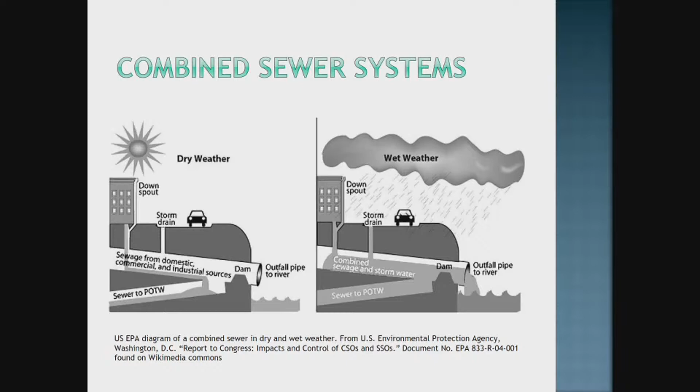Back in 2003, we started with VSK to address the CSOs. About in 2011 is when we got the long-term control plan approved with DNR. It was 10 phases of this plan. We got 1 through 7 completed. There's 3 more that's still to be done. And one thing, like Ted was saying, Iowa, or Ottumwa, was the first community to get a 25-year schedule instead of trying to shove all this down in 10 years.

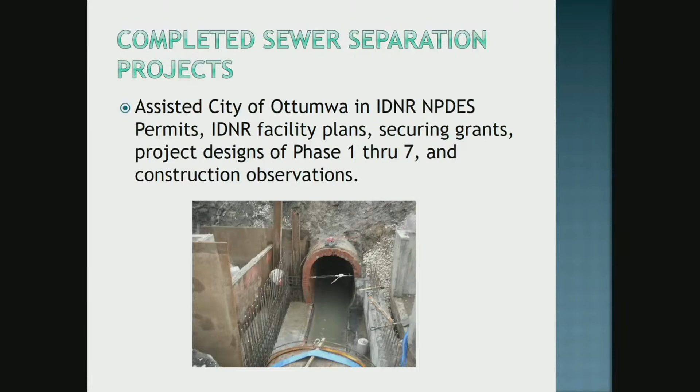This is kind of some construction pictures of past projects. This is the box. You'll see some other ones, but phase 1 through 7, where we were going along, providing a separate pipe for the sanitary sewer. So keeping the box for stormwater, because it's a nice big box, but adding sanitary sewer as a separate pipe to go to the treatment plant.

This was the map Larry was kind of showing you, south. You can see what is highlighted as a lot of the separation that's already taken place. And Blake's Branch is the yellow area, and that just shows how much more the drainage basin is still combining and going into the Des Moines River.

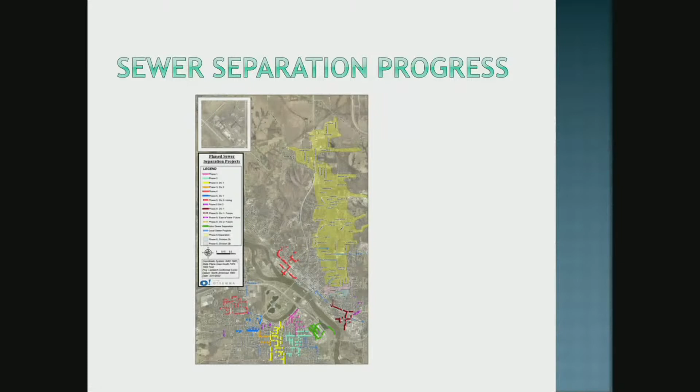Again, this just shows a couple of separate areas. The difference between the blue and purple is the blue consolidates into a pump station and is pumped into the purple area into the Blake's Branch box. So we've got some separation that needs to happen to the north of us too.

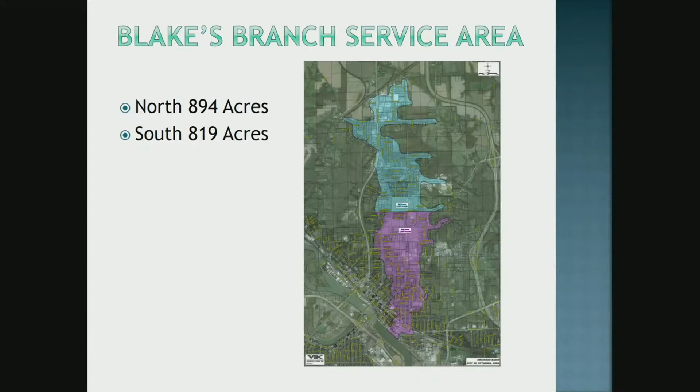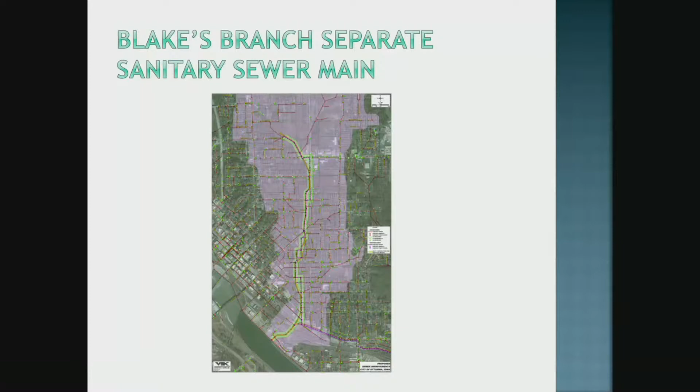This map is a map of the Ottumwa GIS. The big dark red line that's highlighted is Blake's Branch box. That is a box that was constructed, I believe, starting in 1899 through 1910. It's about 9,000 lineal feet. I'm sure it was just built in the Blake's Branch Creek at that time. They built this double wall brick box.

It's in pretty dang good condition, and we got some video. It's been there since the early 1900s, and there's no reason it can't stay in. I mean, it's large, 8-foot by 10. You can't get any bigger pipe. Our strategy is to reuse it, and we're going to make that the stormwater carrier.

One thing I'd say about CSOs, all of the water that falls in that basin, it's not just wastewater from commercial and residential, all of the water is part of the CSO problem. So the whole drainage area - we've done some work on it, especially on the west side and the south side. But that's the intention, to try to save some money by only rebuilding one pipe.

To go a little further in your question, each box is independent. We've had some on the south side where we could reutilize the existing box, and other areas where we had to replace it. It kind of just depended how the mortar held up. The bricks hold up very well, they're almost impervious, but it's the mortar that holds them together.

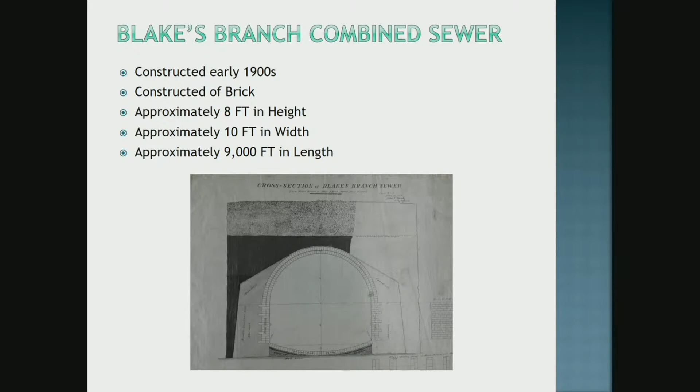We do have a quick little video for your entertainment purposes, just to give you an idea of the size. A lot of people don't understand the size of some of the box sewers and carriers that we have in this town.

So if you ever have to build a new box, would it still be built with brick and mortar, or is it built differently today? No, most likely it'd be precast assembled. We put one on the south side that basically crosses Church and goes up Sheraton - that's a 6x8, probably one of the larger ones we've put in.

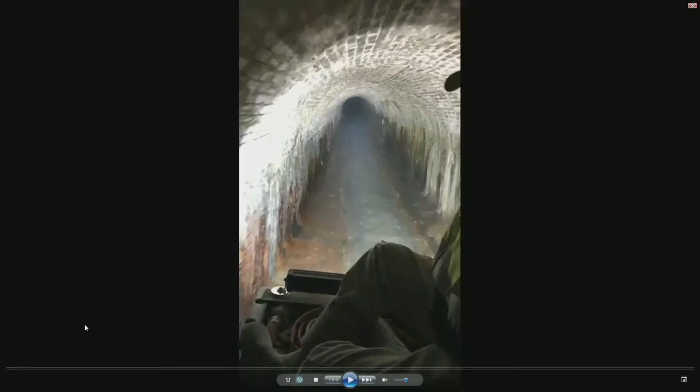Some larger pipes, some 84-inch and stuff. This is an idea - kick that on.

This is the guys - our crews have been very inventive. That's our Ranger, and they ended up taking some of the bars off, added a generator, added a lot of LEDs. They had to go in and actually station that starting at the river, and that's roughly 9,000 feet long.

He must have got a cobweb. But he'll go clear down to the river, and then they actually measure, walk out, paint the wall, put stationing on it, and they're very good at identifying size of pipes, which ones are active. That's all part of the engineering, and there are surveys that are done inside to pick up data.

Those are open for tours if any of you are interested. No, thank you, I'm good.

A lot of people just don't realize there are several of those that cross our city. That particular box starts up by Penn and Jefferson and runs all the way to the river, and that's actually where we enter, behind the old Greenbrier.

So is there some kind of grills or grates where animals and stuff can't get in there? At times - we had gates and stuff on it. I think they're removed right now, and we're looking at how to rebuild the end. It has some deterioration where it's been exposed. That's just yet another project that we need to hit.

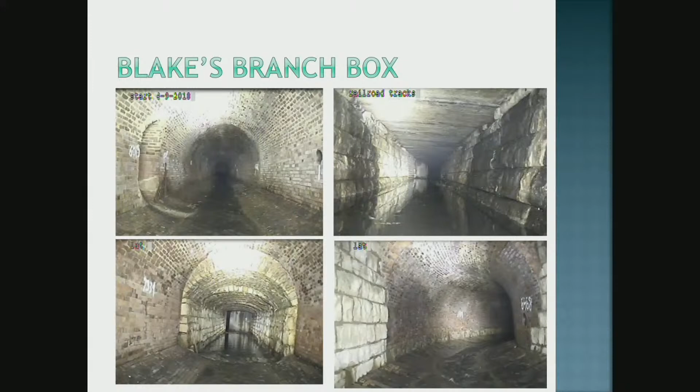While they're messing around, I'll tell you a quick story. Iowa City started their CSO back in the late 60s, and I was the construction engineer. We were out in front of the library, probably 25 feet in the ground, and it was a stone box. So as much wastewater was running outside the box as inside the box, and there were rats and all kinds of exciting things. I looked up, and there was a really nicely dressed, gray-haired lady.

I thought, this is nothing but trouble. I got a phone call from the public works director saying I needed to go talk to the head librarian at University of Iowa. I said, that'd be great. I said, ma'am, can I help you? She said, well, you guys are destroying history. I said, well, understand what's running outside the box is into the groundwater, and we do have rats. She said, no. I said, yeah. I said, you want to go down and see? She said, sure. So I gave her a hard hat, put her in the bucket of the backhoe, and put her down in the trench. She said, well, this is just awful. I said, that's kind of what we're doing here.

Sometimes you got to see it to believe it. You do, you know.

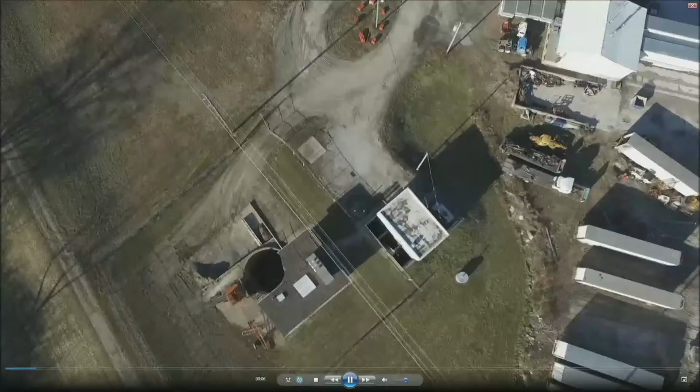So this is a drone flight that Chad put together in the Public Works office. It just kind of shows the alignment of Blake's Branch next to the river. This here is where our new project connected to, the Elm Street Pump Station. It gives an overview of our project and where we've constructed.

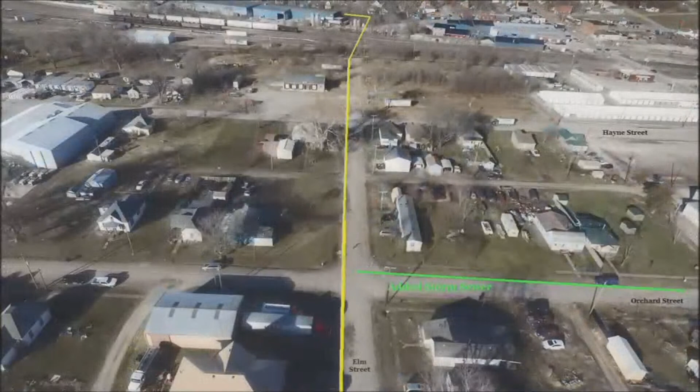You probably heard south of the railroad where we went and put in some new pipes and updated the streets. Everything south of the railroad from Iowa Street down to Cherry is now all separated. That's the project we did, about 2 summers ago. We still have to do some final surfacing in that area. It goes next to Winbco, their processing or manufacturing plant.

JBS is just a little bit to the right of us there. So that is now all separated - we don't have one pipe going into the pump station, or actually another CSO point.

How far underground do you have to put that? So the sanitary sewer in this area, we're like 18 to 20 feet deep. Fortunately we keep going uphill, so we're not struggling with that elevation. On Main Street we got a little bit deeper, 22 feet, but now Main Street has been separated too.

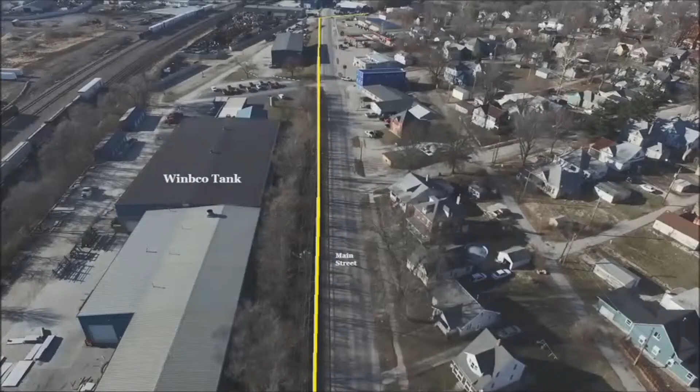The city already had some projects in the past where the storm sewer was separated up the side streets, and now we've separated them further. Now we have a storm sewer and a sanitary on Main Street, completely separated. I think it was about another 150, 200 acres in this area.

One of the things we have to do is long-range planning - this plan goes to '36. This particular sanitary line that starts at the pump station bypasses all the current CSOs. It will ultimately pick up flow from the airport as we go through and pick up things that were separated and recombined. Like any streets we do on Jefferson, we separate them and design them so we can pick them up when this line goes by.

We've got Woodland and multiple other streets that we've done that, going clear back to the early 2000s. So it's kind of a matter of tracking the entire city as far as where you're going to go and then come through.

Their specialty is sizing basins and other design features that we have to keep in mind at the same time. One benefit of the project, especially on the south side, which used to have substantial flooding, is that we're picking up all of that water above the railroad to the north. That's also maybe a potential for an expanded industrial area. So the flooding is going to go away as far as south of the railroad tracks.

So on the north side, we have a lot of brick streets over there. Is the sewer system the same? Does it look the same as the boxes that are on the south side? Well, the brick structures were typically at least 4 feet or larger. Below that, they use clay tile.

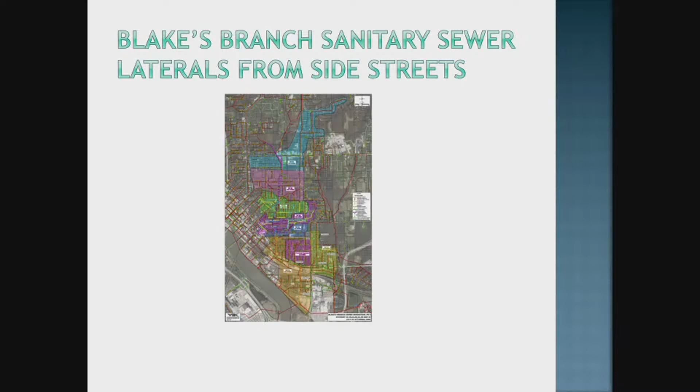So Larry, at this point maybe it would be a good idea to talk about how, even though they're two completely different subjects, the street planning goes into work with the sewer separation planning.

Okay, and I have kind of a presentation on the street selection I was going to roll into. We could start that now. There's a little bit I wanted to cover. I don't want to steal your thunder, I mean, if you've got to put it at a different point in time, then that's cool.

Well, I was going to cover, we handed out some of the funding. We just wanted to point out what we've done as a city and as a department. If you look through, we gave you two handouts — one's just sewer separation project cost, but of course you have a lot of street funding you have to do also. So Mark, you've been here as we combine different funding sources — it's more than just sewer revenue. We include LOST. We've got one of the slides on just different funding options through SRF, they've got a whole program. Ted's been exposed to this, so he could probably tell you more details on some of the nuances, but keep in mind that we do add LOST into these programs, sewer revenue, TIF. There's a lot of different funding sources we use and combine, including grants.

If you look at the sewer separation work we've done to date, just on the sewer side, we've spent somewhere around 91 million, and we've brought in about 34.5 million related to the sewer separation.

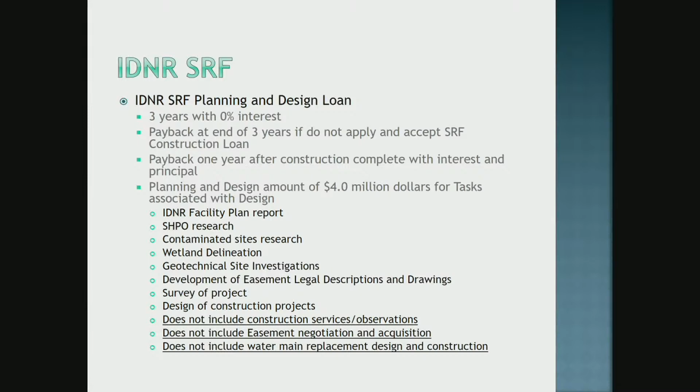The second part was the street programs, which is something we try to address in our overall street planning and programming. We've invested about 83 million, but we've been able to bring in different grants in the $60 million range, or about 72% over the years. We'll roll into the street program now.

Do you guys want to finish a couple of your slides?

Well, the only thing I was going to say is that everybody's excited about the infrastructure grant, $1.3 trillion. And what we're finding is that water, wastewater, and storm sewer projects, CSOs, are all coming through your state IFA, Finance Authority, or SRF.

So what has to happen is you have to get on the IUP, the intended use plan, which you are to a certain extent. Then they're going to start awarding - we're talking about social justice, forgivable loans, grants. They'll always make you loans, but the bad thing about loans is they expect to be paid back. So we need to keep up our political pressure, Mayor, I'm looking at you - through our league, which is very active with this, and through our representatives and senators, we need to let them know we appreciate where we've gone. We've been first to bat to get our stuff done and our schedule on.

But now we're facing some tough times. Costs are going up, inflation is going up. So we need to be sure we're firmly in line when the forgivable loans and grants come out. That's one of the things - it won't happen tomorrow, and they won't get the infrastructure grant put together by tomorrow. But in theory it's a 5-year program, probably a 10-year program. We may need adjustments in timeline, but certainly we want to make sure we don't miss any opportunities for grants and forgivable loans.

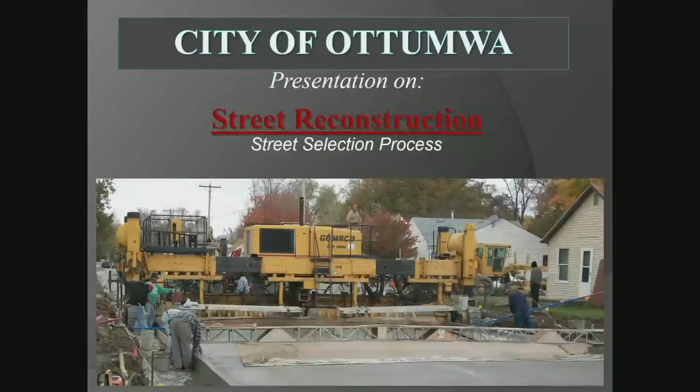With that, let's just roll into the street project. Let's pull that PowerPoint up. A lot of times what we get asked is, how do you select different streets?

Just for background, and again for the citizens and the new council elect, you can see we have about 320 lane miles of hard surface road. That's how you track it based on if you've got 4 lanes or 5 lanes like on Quincy. We've got about 53 miles of alleys that we have to maintain, and we have a fairly small street crew to do all that maintenance. Roll to the next one.

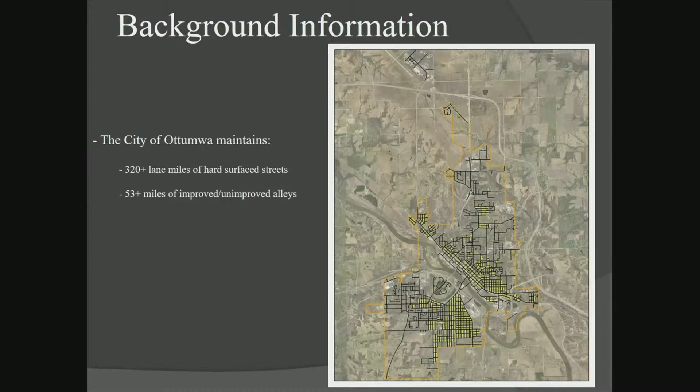We just listed, generally we have about a $54 million budget. The compliance schedule completion date for separation, which is also tied into street replacement, is 2036. Our current estimate, and we haven't gone back through all the new numbers to add this newest inflation of probably 20 or 22% for construction cost, is 160 million. We've done approximately 91 million to date, so that would leave us somewhere around 69 million left to do.

I just listed what we have typically budgeted for street out of road use tax, and then different funding options that we put together to do this. Because one of the things you have to do is put a surface back on sanitary and storm. When you're 22 feet deep, you take out the whole roadway.

We just wanted to show the council that there's a couple different types of projects. You've got the full width reconstruction of PCC on your left, and then on the right a mill and fill and an overlay. Each has its place and purpose.

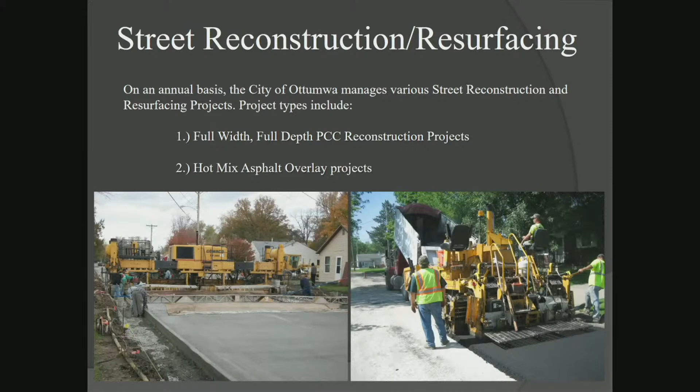Here's where we actually get into looking at the projects. In order to do full width, we need to consider sanitary sewer, storm sewer, water main, and private utilities like electrical, gas, cable, everything that we have. That's something we're facing more and more challenges with as we get more cable and fiber in the ground. Now we've got 5 or 6 companies, and our right of way is getting very congested, which means dollars to us. When we start bidding, our prices continue to climb as you have more utilities that have to thread pipe through or relocate, and it becomes more of an effort to coordinate those functions. Again, we design to the current street manuals.

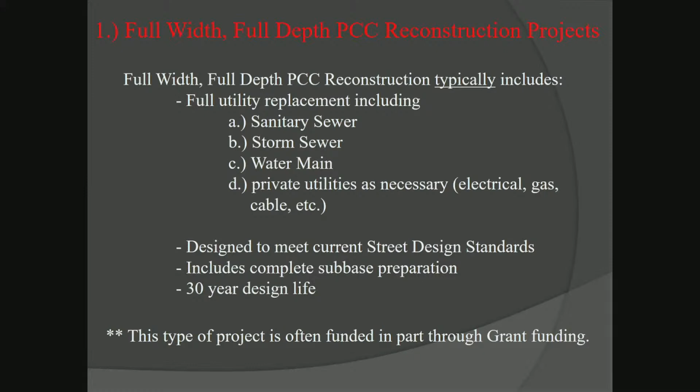The next page gives you some idea of what it looks like for a shallow sanitary sewer as it's going in, and what a base looks like in that upper right. Once you strip your pavement off, you have to go in and do some soil conditioning and sub base before you put your pavement down, with some full depth pavement on the bottom.

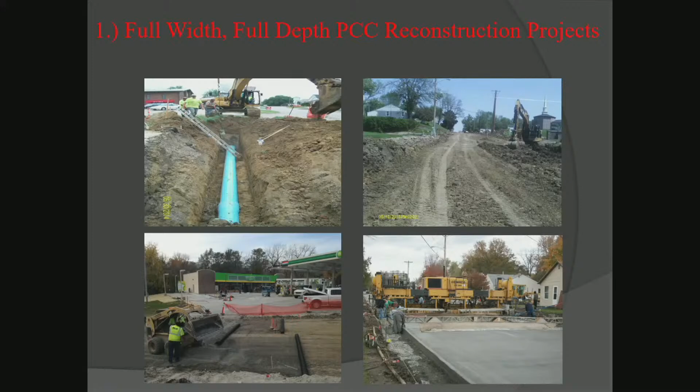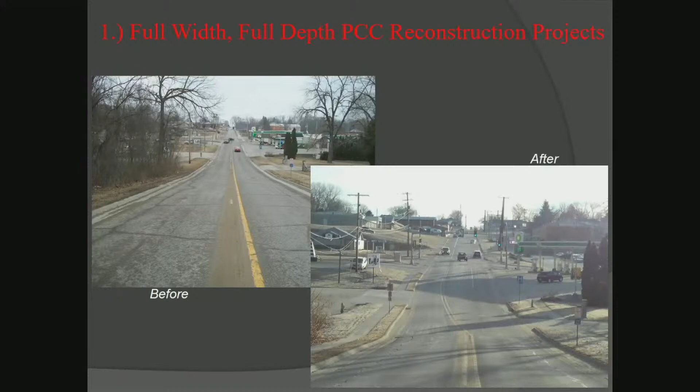Here's a before and after on the Pennsylvania corridor for those who remember when it was just 2 lanes, versus Penn as a full width with a center turn lane, which functions quite well now. That was a project we budgeted for 5 years on our STIP, 2 different times, to get it done. Let's go to the next one.

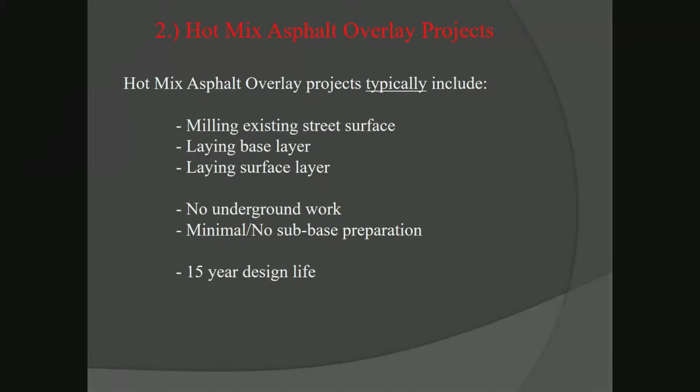The hot mix asphalt process is where you take an existing street surface, mill it off, do a surface patch, then do an overlay on top of that. It does have advantages. It used to be quite a bit more affordable than it is currently, with petroleum prices going through the roof and binder being one of the most expensive parts of that mix. Typically you'd get 15 years with crack sealing and a few other life-extending surface preps, and you could get 20 years just depending on what the base is doing.

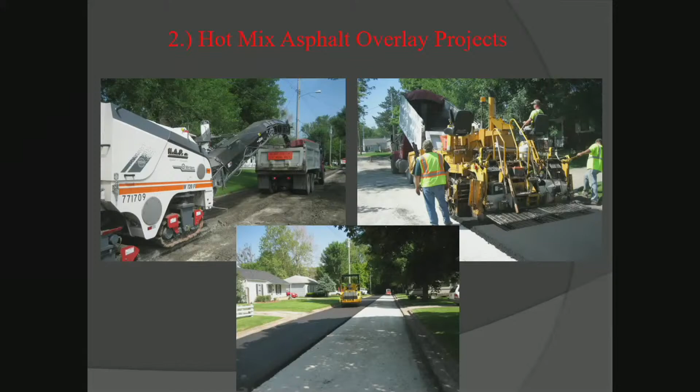Again, just a general picture of construction, and just another one where we milled and filled. We do like those from a timely construction point of view.

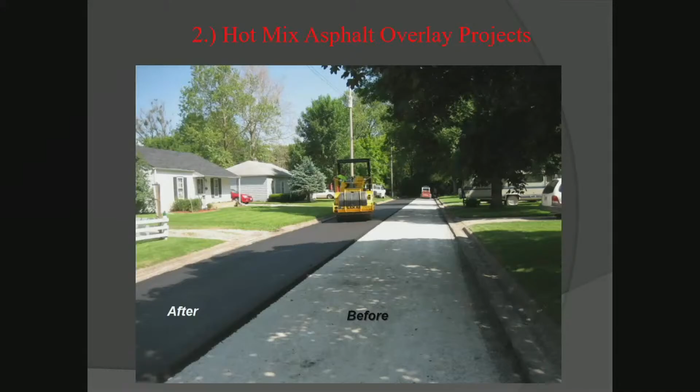The next slide just shows what we've contracted. What we wanted to do is go back on this particular one, and we have a full manual for your view or the public's view. We don't actually put this manual out because it's such an intensive information item, but it is available. It lists every project that we've done from 1995 to 2021.

So we've done 123 lane miles in that time period, either reconstruction or resurfaced through contracted projects. We've spent about 58 million doing street works. And in-house projects, we did 52.4 lane miles at approximately 6 million. We do the small projects where we're a little more cost effective compared to large projects. And again, it gives total lane miles and money spent.

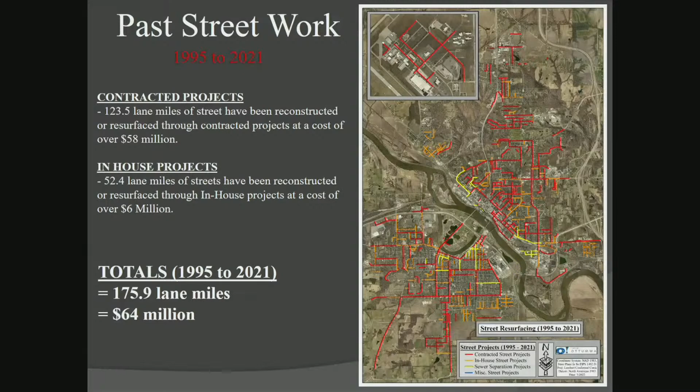The next slide is the criteria. This is the one I probably get the most questions on, is how do you select it? The first thing we look at is funding, does it qualify for any additional grant sources? There's some grants specific to collectors or arterials. Does Ottumwa Waterworks need to replace water main for residential or main lines? They also have aging infrastructure, just like we do on the sanitary side.

Long range plans. A lot of times we'll stay out of an area. I think Blake's Branch is a perfect example. We knew that has been coming for like 8 years, so we did minimal work there. We would simply do patching and stuff to try to keep damage from vehicles down, but we knew we're coming in, we're pulling that surface up. We don't want to spend a lot of money and pull it out a few years later.

Of course, traffic counts come in, and that has an impact on funding sources also. And the type of traffic, is it just local? Is it truck? Is it commercial? All those things we look at. And then we look at annual maintenance, what's it costing us to keep that street in a functional state of operation? And again, existing utilities, that could be ours, it could be water main. And accidents for some of the safety funding. We look at that, public or pedestrian safety.

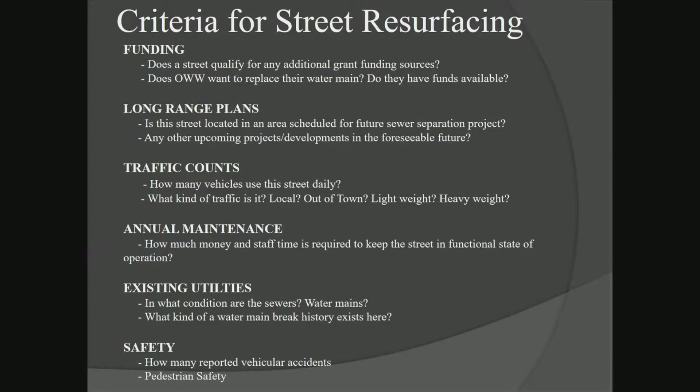That's the short version. Larry, what are some of the main criteria? I don't need to know all of them, but what's the main criteria of whether you're going to go in-house projects or contracted projects? Is there like one or two main reasons why you go one direction over the other?

Well, depending on the size, we're pretty limited with our crew on what we can do. Of course, we don't have full width pavers. A standard paver would take about 20 people to operate. Our crew isn't of size to even run one of those. We can do half width. We can do short runs, you know, 200-300 feet. But our main function in-house has also changed, but is patching and repair, panel replacement, things like that.

We used to do more in-house overlays, but with the pricing structure we receive from HMA providers, it got to a point that the mix, what they charge us per ton, and the difference in what they can haul with their multi-axle trucks versus what we can haul on a single axle truck, we weren't cost effective. They could lay it for about $10 a ton. We cannot lay it for $10 a ton.

We can still do alleys. We typically don't in recent years. Again, it goes back to cost.

We look at that. So has the rising cost of asphalt made it almost the same price as if you use concrete? If you do equivalent designs, I would say yes. The interesting thing on equivalent designs, it's actually more asphalt versus the PCC. Depends which association you ask, if you're talking to the PCC association or the asphalt association. There's always those discussions. But if you do equivalent designs, we have let a few projects with equivalent designs, and the PCC was more affordable at that time.